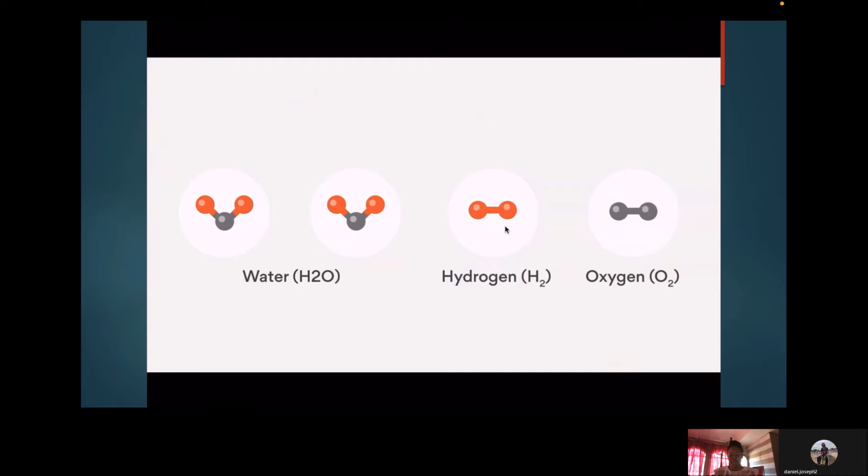Hydrogen is found in the greatest quantities in water, but it can also be found in natural gas, coal, and petroleum. Green hydrogen is produced by using renewable energy to split sustainable water into hydrogen and oxygen. So by harnessing renewable energy sources such as solar and wind in conjunction with hydrogen technology, this is a clean renewable energy that can support domestic energy needs. It can be used as a clean transport fuel, for providing electricity to the grid, and in factories to offset the carbon from manufacturing processes. Hydrogen energy is environmentally friendly, so when burnt as a fuel, the only byproduct is water.

Now that you've gotten a little insight into what hydrogen energy is, I would like to introduce you all to our guest speaker, Mrs. Cassandra Dewan. Cassandra Dewan is currently pursuing her PhD part-time in metallurgical and material engineering at the Universidade Federal do Rio de Janeiro. Her research area is carbon capture and utilization. She has a keen interest in hydrogen energy and firmly believes that it will play a vital role in the energy transition. In addition, Cassandra holds a Bachelor of Science in Chemical and Process Engineering and a Master of Science in Petroleum Engineering from the University of the West Indies.

She has over 8 years of professional experience and has worked both upstream and downstream with individuals across all disciplines and departments globally. Cassandra is currently the SPE Latin America and Caribbean Region Young Professionals Liaison, a member of the SPE Young Member Engagement Committee, and the SPE Student Paper Contest and PetroBowl Lead. In 2020, she was awarded the SPE Regional Young Member Outstanding Service Award, and in 2021, she was awarded the SPE Giovanni Paccaloni Young Professional Service Award. Additionally, Cassandra is a volunteer teacher at Cidadão Pró-Mundo, where she teaches English to teenagers and adults from needy communities in Rio de Janeiro, Brazil. Now I'll pass you on to Ms. Dewan for her presentation. Thank you.

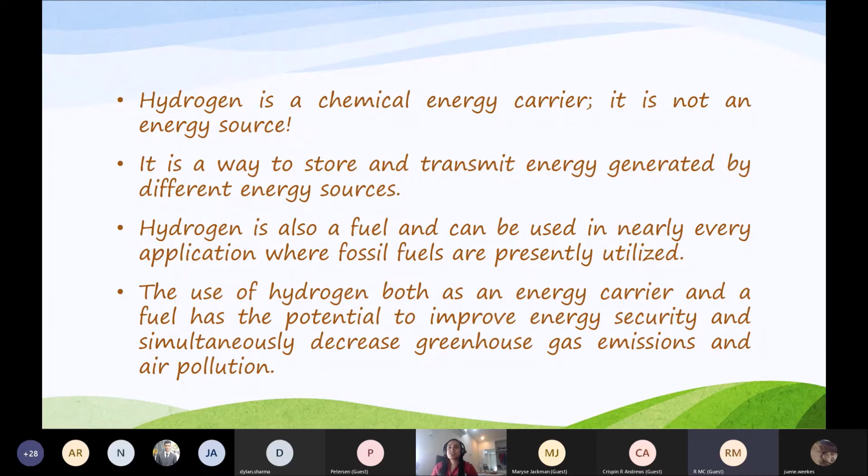The use of hydrogen, both as an energy carrier... decrease greenhouse gas emissions and air pollution. Gray hydrogen accounts for 70% of the global hydrogen production. It is produced by... methane reacts with steam to produce hydrogen and carbon oxides, as shown in equation 1 and 2. Its production cost is the lowest at 1 to 1.8 USD per kg.

Nevertheless, its byproducts, carbon monoxide and carbon dioxide, are emitted into the atmosphere, thus negatively impacting global warming and climate change. Subsequently, gray hydrogen is not a long-term solution and should only be used at the start of the hydrogen energy transition to assist in the establishment of hydrogen supply infrastructure, as well as the commercialization of hydrogen utilization technologies. Most likely, it will not benefit from government financial incentives and is incapable of competing alongside the same fuel that it is generated from.

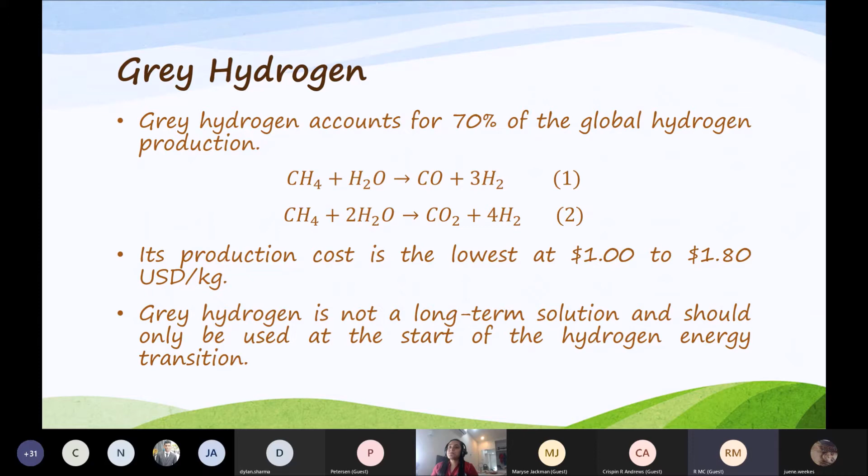Blue hydrogen is produced when gray hydrogen is combined with carbon capture and storage technology, therefore reducing the amount of carbon oxides released into the atmosphere. Steam methane reformation and depends on whether post-combustion CO2 capture is applied or not. Presently, SMR and CCS have a technology... and ready for commercial application in an operational environment.

The production cost of blue hydrogen from SMR with CCS is 1.5 to 2.3 USD per kg. This production cost is expected to decline as CCS technology continues to improve and is implemented in large-scale projects. Furthermore, it has an advantage as it builds on the industry's existing knowledge and expertise in grey hydrogen, and in several cases, the facilities can be simply upgraded by adding CCS systems.

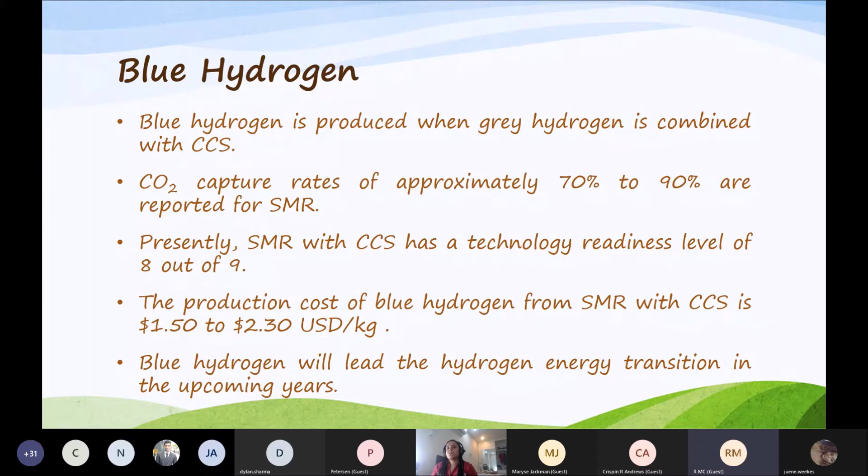Blue hydrogen will lead the hydrogen energy transition in the upcoming years until renewable energy sources... this transition by establishing financial incentives in the form of carbon tax, carbon credits, and public funding to encourage companies to install CCS... jobs, consequently helping nations to recover from the COVID-19 pandemic.

Green hydrogen is produced from water using electricity from renewable energy sources, for example, solar, wind, hydro, geothermal, and biomass, through electrolysis. The overall chemical reaction is shown in equation 3. When electrical energy passes through water, its molecules decompose into hydrogen at the cathode and oxygen at the anode. The half reactions at the electrodes are shown in equation 4 and 5.

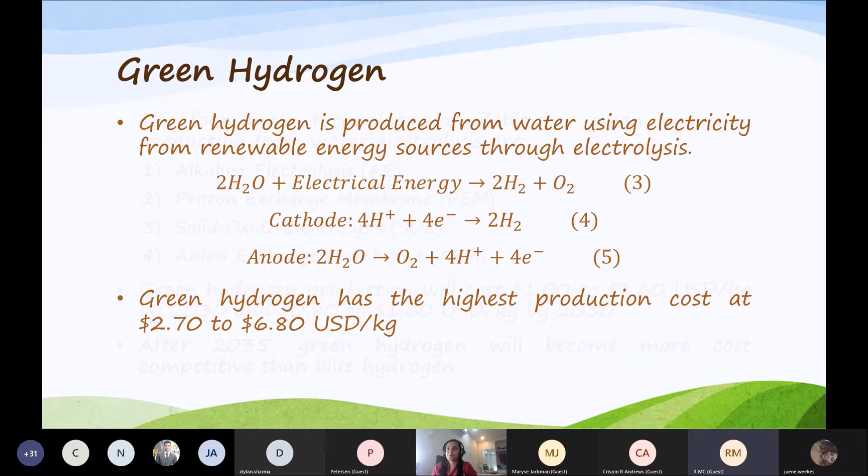Even though green hydrogen is the cleanest form of hydrogen with the least negative impact on the environment, it accounts for less than 1% of the global hydrogen production. This is because green hydrogen has the highest production cost at 2.7 to 6.8 USD per kg, due to the considerable amount of electrical energy needed for water electrolysis. Electricity cost is an imperative factor for green hydrogen production costs. The 4 main technologies available for green hydrogen production from water electrolysis are alkaline electrolysis, proton exchange membrane, solid...

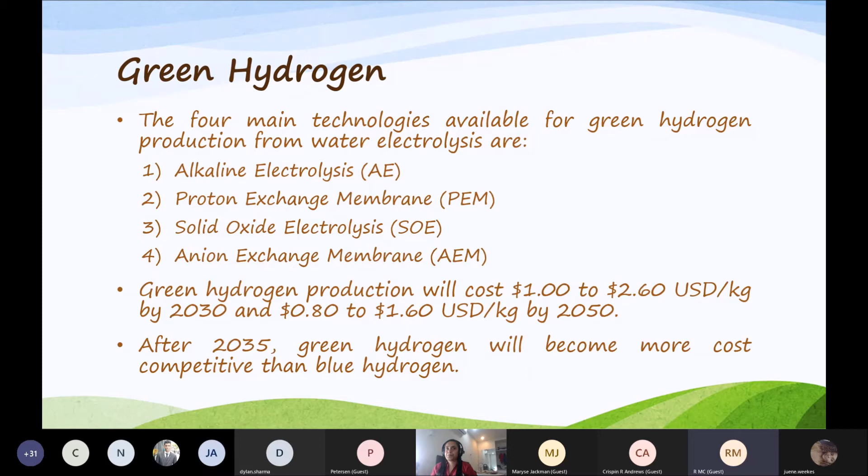...economically using fossil fuels together with CCS, that is blue hydrogen, well until 2050. BNEF has estimated that green hydrogen production... from 0.8 to 1.6 USD per kg by 2050. By 2035, there should be an abundant supply of renewable energy sources coupled with an increase in green hydrogen production. After this period, green hydrogen will become more cost competitive than blue hydrogen. So now I'm going to talk about the uses of hydrogen.

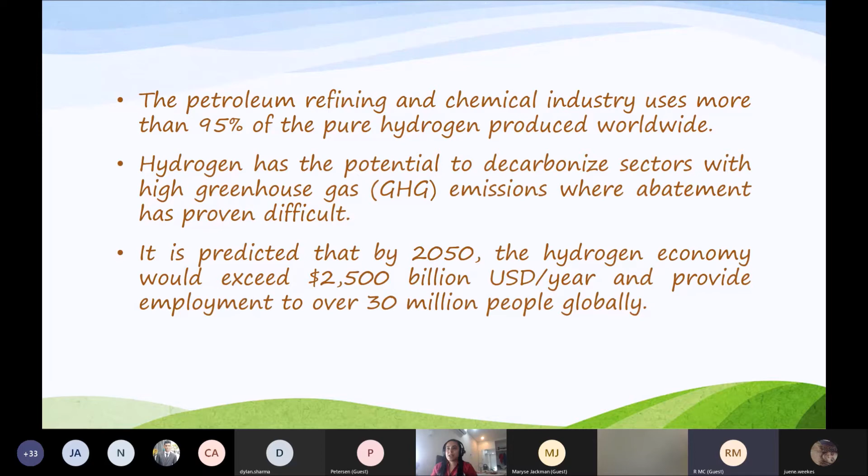The petroleum refining and chemical industry uses more than... to support the implementation of hydrogen technologies has restricted its application across other industries. Hydrogen has the potential to decarbonize sectors with high... industrial manufacturing, power generation, and buildings. It is predicted that by 2050, the hydrogen economy would exceed 2,500... Transport is one of the most promising and challenging sectors to decarbonize, since gasoline and diesel, petroleum products, account for 9%...

In the short term, hydrogen can be blended with petroleum products to improve the combustion efficiency and lifespan of internal combustion engines, as well as reduce CO2 emissions until the cost and efficiency of hydrogen-powered fuel cell vehicles and battery electric vehicles improve. In the long term, the implementation of FCVs, BEVs, or a hybrid combination of both will support the decarbonization of the transport sector by further lowering CO2 emissions whilst improving local air quality and reducing noise.

Note, more attention and investment need to be placed on hydrogen refueling stations, hydrogen grids, and hydrogen tankers in order to make hydrogen fuel more accessible and widely accepted.

Globally, China has invested the most capital into hydrogen research and development and intends to have 1,000 fuel cell buses running for the 2022 Winter Olympics in Beijing. Since 2019, there have been 2 refueling stations operated in Shanghai, and there are plans to have a total of 1,000 hydrogen refueling stations by 2030.

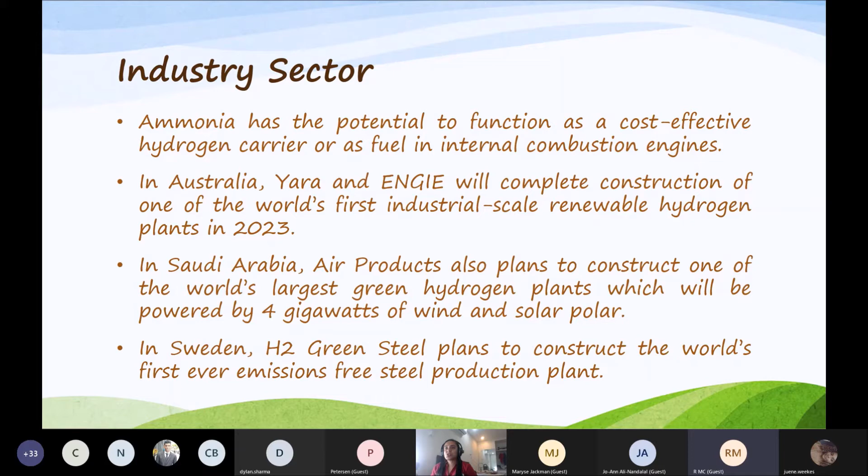Nonetheless, there are two promising applications. Firstly, hydrogen can be used as electricity storage via the power to gas, specifically the power to hydrogen concept. The green hydrogen that is produced from excess renewable energy is stored underground in depleted oil and gas reservoirs or overground in tanks, transported, and then reused for grid stabilization. This process is called power to hydrogen and is basically the conversion of electrical energy to chemical energy through hydrogen gas production. In 2020, the world's first power to hydrogen demonstration project commenced in Saillat-sur-Vienne, France.

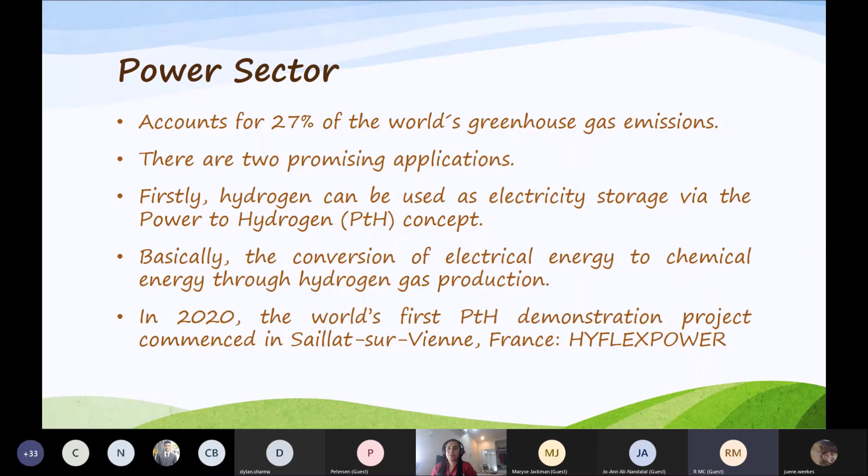Fired power plants. That is, hydrogen can be used as a feedstock for hydrogen power plants, which will generate clean and transmittable power. As of 2020, the worldwide natural gas-fired generation capacity was around 1,900 gigawatts. Turbine manufacturers Mitsubishi Power, GE, and Siemens Energy are presently working on developing turbines to run on 100% green hydrogen by 2030. It should be noted that in an effort to support the hydrogen transition, these companies have been blending hydrogen and natural gas to create mixed gas turbines in the interim.

In the US, Long Ridge Energy Terminal is currently constructing a 485 megawatt combined cycle power plant that will operate on green hydrogen. It will be the first hydrogen burning power plant in the US, as well as the first to blend hydrogen in a GE hydrogen gas turbine worldwide.

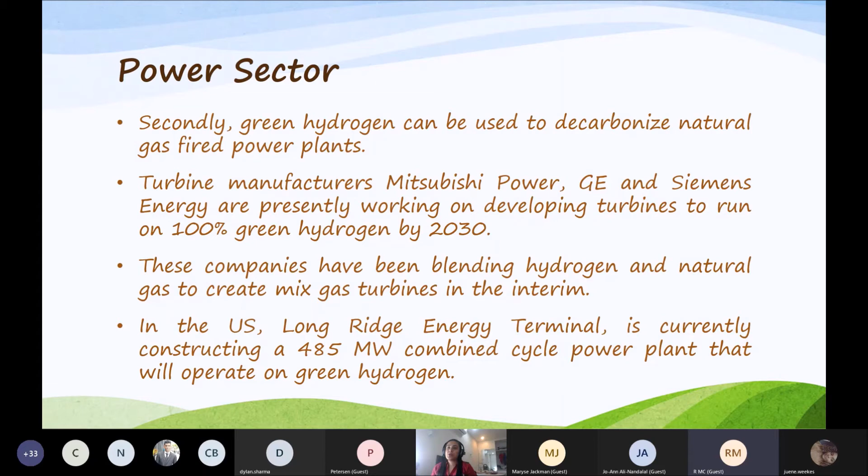Another sector with potential hydrogen application is heating. Some projects have already started to explore the various hydrogen applications, which include mixing hydrogen with natural gas, also known as hytane, to heat residential and commercial buildings, replacing heating with 100% green hydrogen, and developing dedicated hydrogen boilers. In the UK, more than 30% of CO2 emissions originate from heating and cooking.

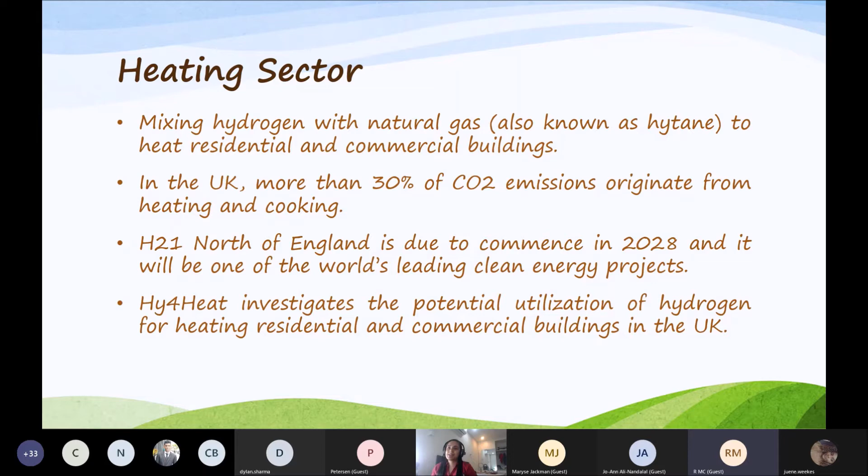H21 North of England is due to commence in 2028, and it will be one of the world's leading clean energy projects. It will convert 3.7 million residential and commercial buildings in the UK from natural gas to hydrogen, consequently reducing CO2 emissions and providing decarbonized heat. Hy4Heat is a program that investigates the potential utilization of hydrogen for heating residential and commercial buildings in the UK. In April 2021, the UK opened its first set of houses with hydrogen-powered household appliances in Low Thornley, Gateshead.

In the UK, 8 out of 10 homes use natural gas boilers to power their central heating. Furthermore, inefficient boilers increase both natural gas consumption and CO2 emissions in the heating sector. However, replacing all the natural gas boilers with renewable heating systems would be infeasible and expensive. Consequently, a more practical solution would be to replace natural gas boilers with hydrogen boilers.

From 2025, natural gas boilers will not be installed in new buildings in the UK. In 2019, the world's first 100% green hydrogen boiler commenced operation in Rozenburg, Netherlands. The manufacturer of this hydrogen boiler, BDR Thermea Group, is currently partaking in a large-scale demonstration project in the UK. The goal is to install more than 400 hydrogen boilers by 2022.

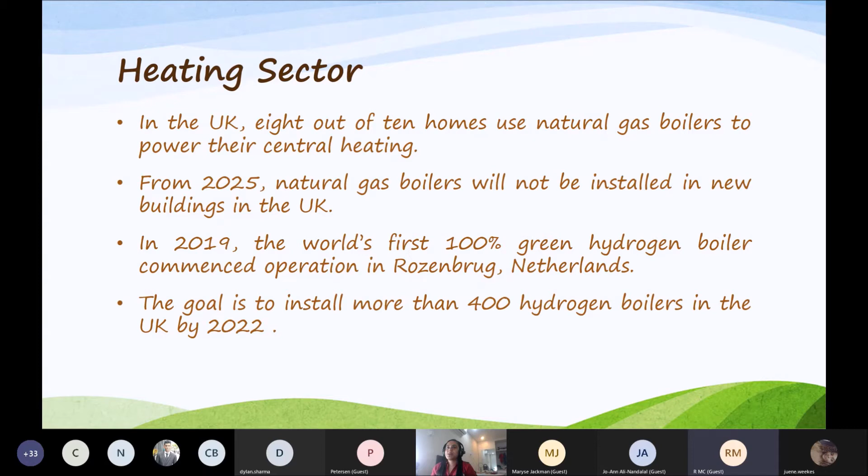Now in this section, I will briefly analyze the 5 main factors affecting the energy transition from fossil fuels to hydrogen. The hydrogen economy will flourish when the cost of hydrogen, which includes its entire life cycle, that is production, storage, transportation, and utilization, can compete with the cost of fossil fuels.

Currently, hydrogen cannot compete with both fossil fuels and renewable energy sources due to the high energy loss during production. Additionally, expensive electrolyzers plus platinum-based metals, which are required to manufacture most commercial fuel cells, have made the large-scale production of hydrogen more uneconomical. On the contrary, as the production cost of renewable energy continues to decline in the coming years and the supply of renewable energy becomes abundant, green hydrogen production will develop into a feasible option, granted that there is a decrease in the cost of electrolyzers.

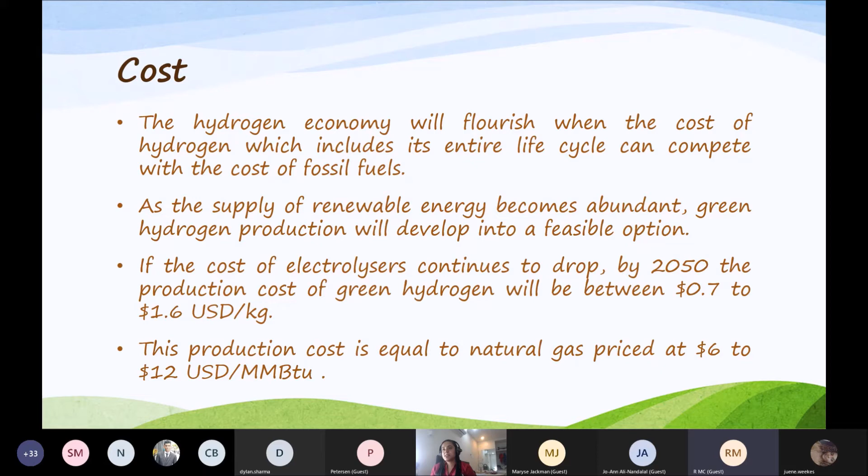If the cost of electrolyzers continues to drop, BNEF calculates that by 2050, the production cost of green hydrogen will be between 0.7 to 1.6 USD per kg. This production cost is equal to natural gas price at 6 to 12 USD per MMBTU, therefore making green hydrogen competitive with natural gas on an energy equivalent basis, as well as cheaper than blue hydrogen.

Hydrogen has a safety factor of 1 and is the safest fuel when compared to gasoline and methane, whose safety factors are 0.53 and 0.80 respectively. Still, hydrogen poses 3 main technical safety challenges. 1. Hydrogen is extremely light and flammable. Hence, it can easily leak and cause a fire, deflagration, or detonation.

Hydrogen flammability is a function of its concentration level, and its flame is hotter and faster than that of other fuels. Hydrogen presents a risk in confined, unventilated spaces rather than open areas because the gas cannot easily escape, resulting in significantly higher overpressures. Explosion venting, such as pressure relief panels, can be used to decrease the effect of deflagrations in confined spaces. Also, hydrogen detectors should be installed in enclosed fueling operations to promptly detect leakages and ensure safe operations.

2. The auto-ignition temperature of hydrogen is 585 degrees Celsius, which is the highest when compared to other fuels, and is a positive safety characteristic. But in the presence of oxygen, this temperature decreases. Additionally, hydrogen's low electroconductivity rating is a concern since both liquid and gas flow, along with agitation, generates electrostatic charges which can potentially trigger sparks. Consequently, all hydrogen equipment should be electrically grounded.

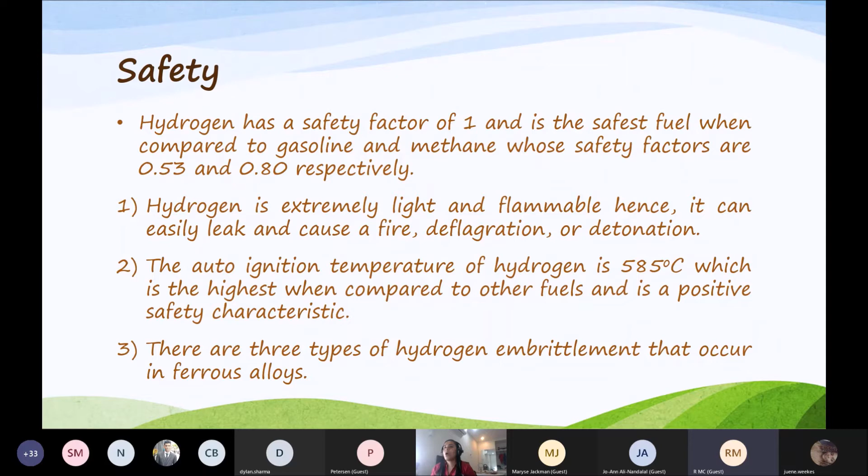3. There are 3 types of hydrogen embrittlement that occur in ferrous alloys. Environmental embrittlement that causes losses in ductility, surface cracks, deformation, and decrease in fracture stress. Internal embrittlement that generates internal cracks, plus hydrogen reaction embrittlement that creates brittle hydride. Hydrogen embrittlement can be prevented by coating techniques, plating techniques, selecting amorphous structure material, adding aluminum and titanium to base materials, as well as creating a barrier for hydrogen penetration by adding a carbon, nitrogen, and oxygen diffusion layer.

Local and national governments equally play a crucial role in accelerating the growth of the hydrogen economy because of the substantial amount of capital involved, and the level of assurance mandated by lenders and sponsors to ensure successful project development. Governments can provide support through regulatory frameworks, deliberate and strategic programs, as well as by implementing policies and tax incentives which will create a market. Central government support can also be provided through government-funded research and development to develop hydrogen technologies and demonstrate their reliability.

Public-private partnerships involving infrastructure developers, public investors, private investors, vehicle manufacturers, etc. Other government financial support mechanisms such as government guarantees, tax incentives, equity loan hybrids, preferential long-term loans, and financing schemes for first movers. And lastly, public procurement and fleet regulation. The government can boost hydrogen demand by procuring green electricity, heating, and vehicles, for example, hydrogen buses and FCVs for government fleets. Fleet regulation can also create a demand for FCVs, minimize the entry barriers for first mover companies, as well as assist in scale-up efforts for infrastructure developers and vehicle manufacturers.

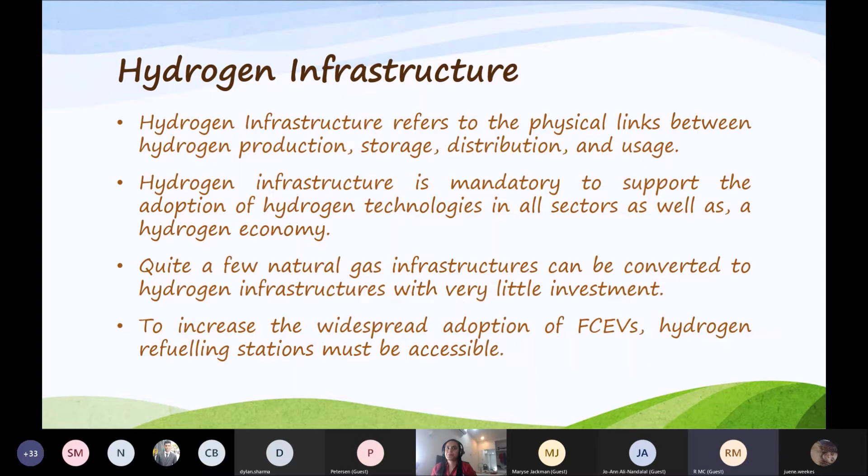The public perception of hydrogen is of vital importance in the energy transition. At present, hydrogen is not an attractive fuel due to being perceived as dangerous and explosive. It has a history of being involved in serious industrial accidents that resulted in major societal and economic costs. The first accident occurred back in 1937 when a hydrogen-filled Hindenburg Zeppelin in New Jersey exploded. Although it was publicly stated that the material coating caused the explosion, hydrogen took the rap.

Three other accidents listed in the literature are a hydrogen release during maintenance in Houston in 1989, the rupture of a pressurized hydrogen tank in Frankfurt in 1991, and a hydrogen explosion at Air Products and Chemicals Inc. in California in 2019. These accidents have been assiduously investigated and resolved with solutions put in place to prevent further disasters. The transition from fossil fuel to hydrogen can be seen not only as techno-economic, but also social, because different societies share dissimilar views on the implementation of new technologies.

Effective public education will be the driver in gaining widespread acceptance of hydrogen technologies. The program should include the aim of the hydrogen economy, that is, to achieve a carbon neutral society, and the feasibility of attaining it. Moreover, it should speak the language of the participants it is geared towards and be sufficiently persuasive to receive support. The public wants to know how the different applications of hydrogen will affect their lives. Therefore, a variety of studies related to the possible hydrogen economy scenarios is compulsory. Notably, government investment in developing innovative hydrogen technology would improve partially constructed hydrogen infrastructures, subsequently solidifying a positive social standing for hydrogen.

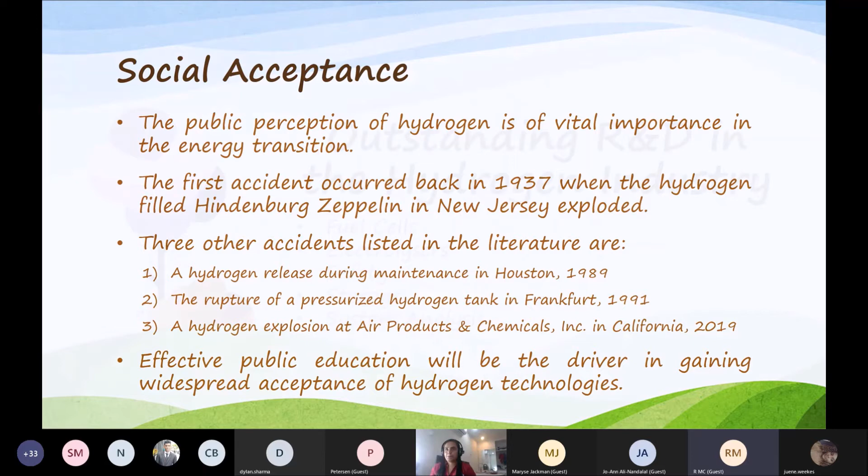Globally, several countries are making considerable efforts in the research and development of hydrogen technologies to accelerate the energy transition from fossil fuels to hydrogen. Some governments have implemented national programs using cutting-edge hydrogen technologies that have the potential to create a carbon-neutral society that will benefit future generations. Yet, several technical gaps still exist, and more research and innovation are required to develop solutions that are technically feasible and possible. To accomplish this, more collaboration is needed between governments, companies, universities, and organizations.

Some areas where additional research and development is required in order to guarantee a safe and sustainable path for the hydrogen energy transition are: 1. Fuel cells. More research is needed to make commercial scale fuel cells cheaper, as well as to improve their performance and durability. Electrolyzers. More research is needed aimed at lowering the cost of electrolyzers and improving their efficiency. Also, electrolyzers should be designed to use seawater as feed instead of distilled water.

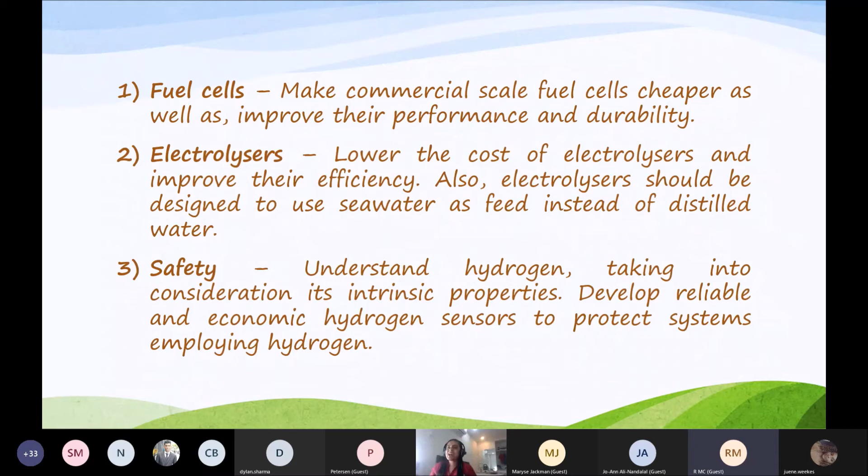Safety. For considerable headway, research into understanding hydrogen, taking into consideration its intrinsic properties, will be crucial in achieving a high degree of safety. Additionally, reliable and economic hydrogen sensors must be developed to protect systems employing hydrogen. Storage. Hydrogen storage poses the biggest challenge for the hydrogen economy. Further research is needed in terms of effective storage systems, volume, size of tanks, material properties, chemical and metal hydrides, system configurations, costs, duration, hazards, leakage and ventilation, and speed of discharge.

System analysis. Procedures need to be created that focus on the development, demonstration, and deployment of the hydrogen supply chain, considering the array of energy sources, renewable energy coupled with hydrogen energy transition pathways, production and storage technologies, infrastructure, and the ecological, economical, and societal concerns.

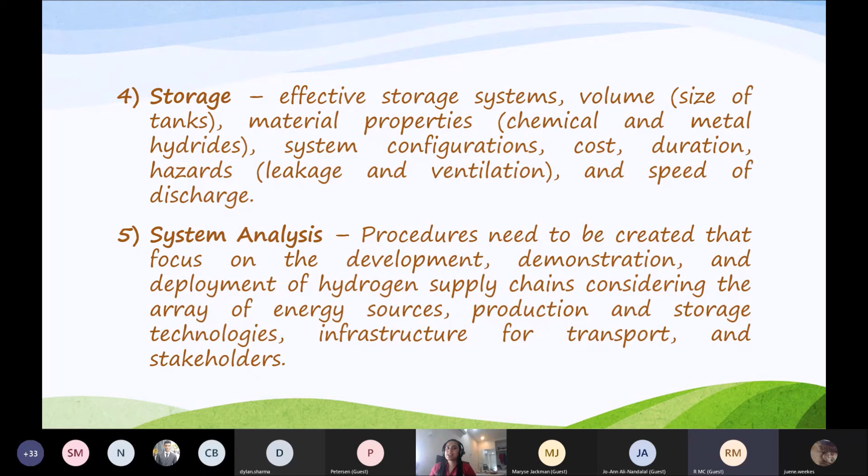So now I'm going to look at some of the conclusions from today. Today's energy system is unsustainable. It is incapable of supporting continuous economic growth due to limited fossil fuel reserves, the decrease in cheap oil, the capacity of the environment to absorb greenhouse gas emissions, and the increase in energy demand. Hydrogen is a non-toxic, clean-burning, versatile, and efficient fuel with the potential to improve energy security while reducing greenhouse gas emissions. Nevertheless, the world still has a long way to go before transitioning to a completely developed and operational hydrogen economy.

The transition from fossil fuels to hydrogen is progressing in phases, from gray to blue to green hydrogen. The world is currently in the blue hydrogen phase, also known as the bridging phase, where stakeholders are exploring the synergies between the oil and gas industry, gas reserves, CCS resources, reusing existing infrastructure, and the renewable energy industry before a full transition to green hydrogen.

The scale-up of renewable energy sources is allocated to decarbonizing the present power sector. However, the power capacity of these renewable energy sources is not sufficient to support clean power generation and the expected increase in hydrogen demand. Consequently, blue hydrogen is needed to satisfy the increase in hydrogen demand during the transition phase, as well as to solve the integration of hydrogen with natural gas networks and design storage facilities that will support grid stabilization capacities.

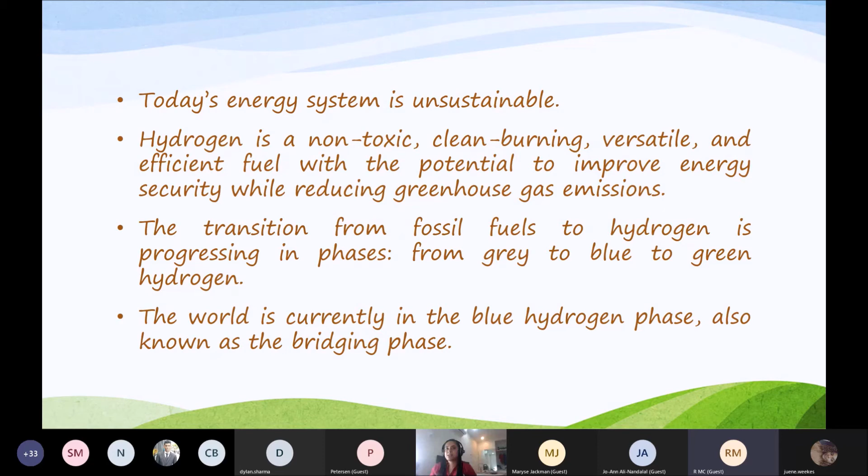Governments will play a crucial role in strengthening the hydrogen economy. Nowadays, the cost of hydrogen and scaling up hydrogen infrastructure is considered too expensive when compared to fossil fuels. For this reason, governments must include the development of hydrogen projects on their political agendas and provide the necessary support through regulatory frameworks, deliberate and strategic programs, as well as by implementing policies and tax incentives.

Also, the hydrogen value chain encompasses an array of sectors: transport, industry, power, and heating, plus end users, with the possibility of creating employment for more than 30 million people globally by 2050. The hydrogen energy transition is still an unfamiliar territory. It will take decades to transform hydrogen into a sustainable energy carrier that will mitigate the effects of greenhouse gas emissions, as well as improve energy security.

The oil and gas industry is well positioned and has the necessary resources and technical capabilities to continue to drive the hydrogen energy transition on a global level. If stakeholders continue along the current path that they are on today, it is estimated that green hydrogen could potentially meet around 25% of the world's energy demand by 2050.